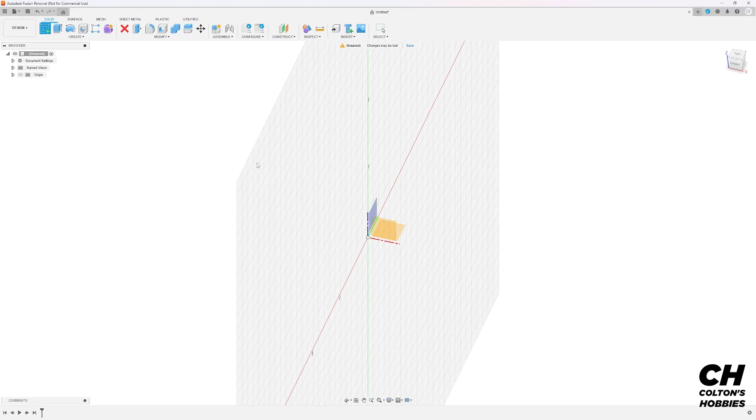So to get started here, we're going to create a sketch, and so a lot of times you're going to see sketches in this program, and then you're going to extrude something to be able to create the material. So let's grab our rectangle.

I don't want a 2-point rectangle because I want it to be on the center. So we're going to go to rectangles. You can see there's a 2, a 3-point. I'm going to do a center rectangle. I'm going to select the center point.

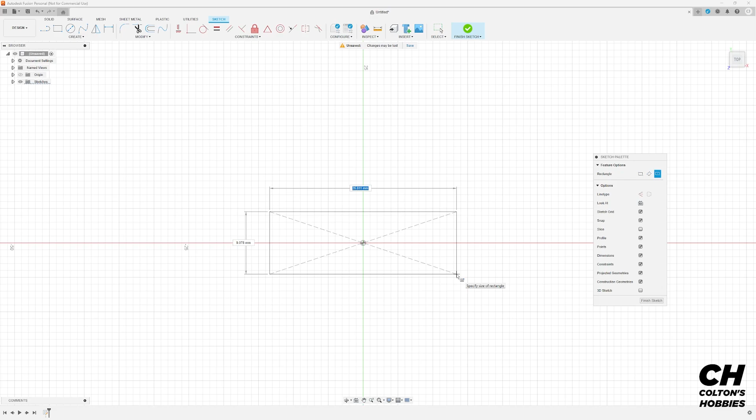And then as you can see, I have my rectangle, and I can adjust it with my mouse any way I want it, but I'm going to start putting in some numbers here, and it's going to dimension it for us. So I want it to be 80 millimeters wide. I'm going to hit tab. So it sets that top number in there, by 40 deep.

And obviously this is pretty big on our screen, so we can zoom out, use the middle mouse button to move around, and we have our wall.

Now we need to add some thickness, so we're going to go up here to offset. We're going to click our line, our outline of our building. Now this, depending if you're 3D printing, you can make this whatever you want to be, but if you're going to 3D print or if you're going to laser cut your building, you would want to set this thickness, in my opinion, to the thickness of the material you're working with. So if it's a 3mm MDF or basswood, set it to 3.

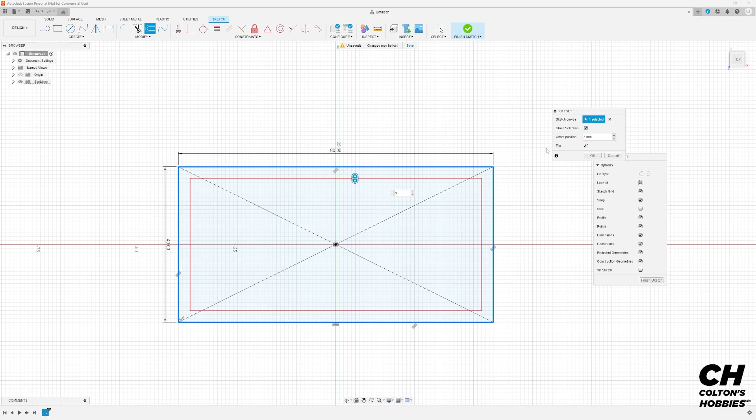So now that we've done that, we can hit OK. And now we could come out of here, extrude this up, make a 3D item, but you really would like to set up your doors and your windows before we get into that.

So let's make a door. So we're going to left click on 1 point. This is a 2-point rectangle. We're going to change this to the door width, and so I've set a parameter.

I'll talk more about that towards the end. And so this is automatically setting it to a set width, which I've set up as 10. Next, we need to, unfortunately, dimension these 2 points. I'm not sure why, I got to look into it, but we left click, and you can see how the blue line is just around the door.

We go to the top line, and we say 3 millimeters. Then we would like to further constrain this, because if you see the blue lines on the left hand side of that door, it's blue. We want that black. Black means it's fully constrained, and it's going to stay there if we adjust the model in the future. So we're going to tell it to be 10 millimeters away from the right wall. So that's door number 1.

We're going to make door number 2. Going to do the exact same thing over here. We'll dimension it, so from here to here, we're going to do door width. And then we need to set another dimension from this corner. We'll say it's going to be 15. And then just in case, we'll left click, select that sketch line, and it's already defined.

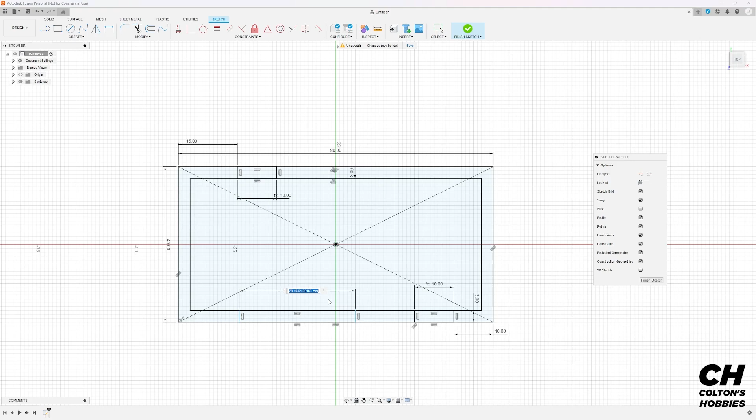All right, next, we're going to make some windows. And so I'd like a large window in the front of this house. And so I didn't have a parameter already set for this. So we'll left click, it's close to 30 millimeters, just for sake of even numbers.

We'll left click both the left side of that window and the left side of the building, and when we select it, we'll make it 15 from the side, and now that should be fully constrained. We'll double check, and it is.

Okay, next, we're going to create a window on the side of this house. We'll make it a 2-point rectangle. Once again there, we'll dimension from here to here, and I like that to be about 15.5. It looks like it's somewhat centered, but we need to dimension how wide this window is, so we'll go to window.

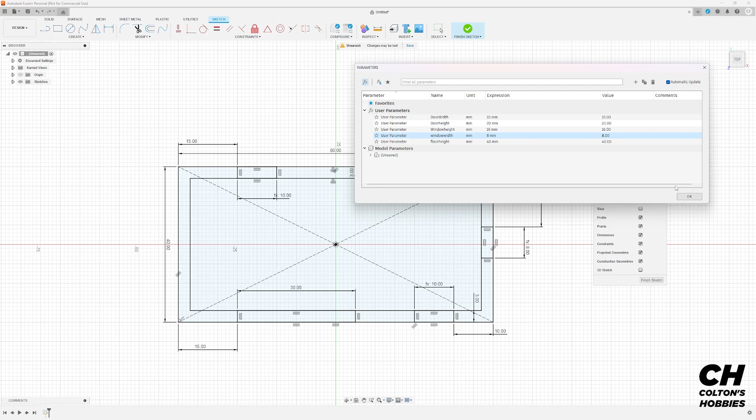They're both height, interesting, I typed in the wrong thing. But the bottom one seems to be the best, it's 8 millimeters. So I can go up to modify, change parameters, go to my window height, that's 8, switch that to window width, hit OK, and you can see how that's the same.

It still works. All right, last but not least, I want to do another window over here. We'll dimension that as well. And we're working in the solid workspace. And I want to go back to my sketch, so I'm going to double click here.

Sorry, we click on the sketch here. I misclicked. All right, so we'll go to sketch dimension, sketch that window, window width, and then we're going to dimension it from the side. We'll say it's 8. And then we're going to do one more window, and that's because I'm going to show you how to pattern the windows when you have a flat surface.

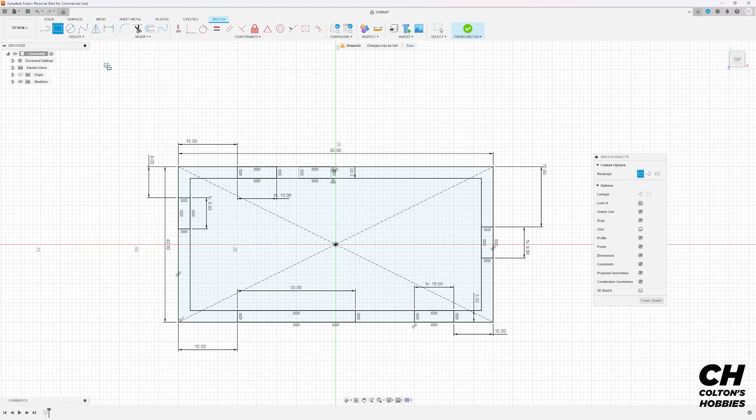You can pattern them all the way around the building, but typically if you can create them on your own, pattern a few things, because if you start patterning too much, Fusion 360 or your computer is going to really struggle. I tried to pattern like 40 different things, and it did not like that.

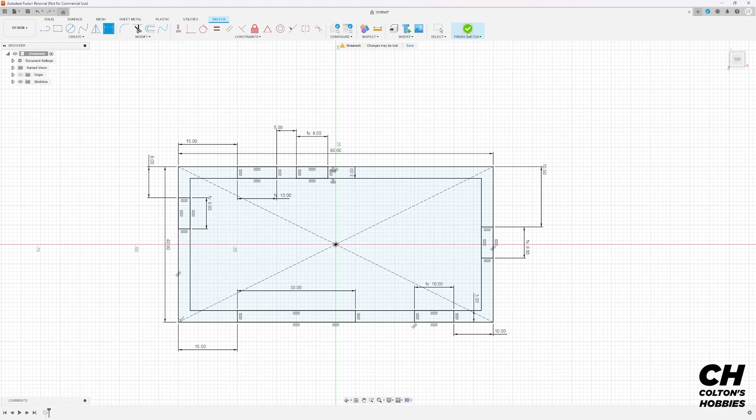So then I'm going to just finish dimensioning this. We'll say it's 5 millimeters away from that doorway, and then we're going to hit Finish Sketch. As you can see, we have our doorway, other doorway, 1, 2, 3, 4 windows.

Now it's time to extrude. So extruding is adding the material to your building. We're going to select the entire area, even though the windows and that are kind of separate here.

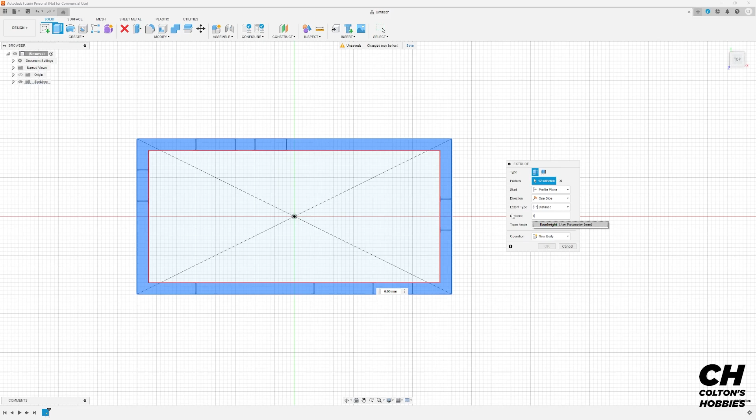And then the distance, I'm going to change to floor height. You can type in any number you want. We're going to new body, just means that it's a new structure, a new piece. We'll get into more of that in future videos. We'll hit OK. So now we have our rectangle. Doesn't really look like a house, but we're getting there.

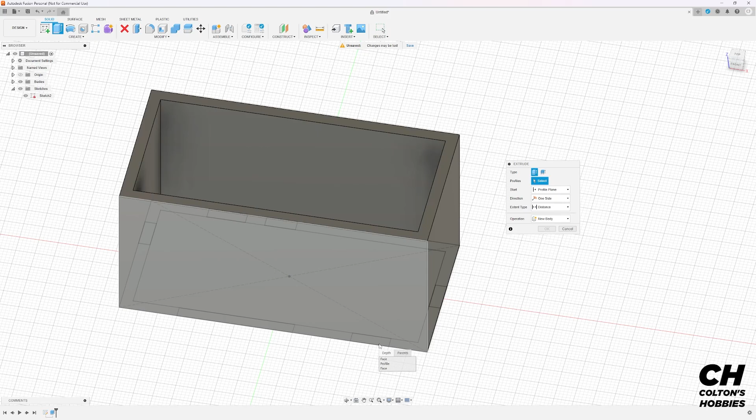So next we're going to extrude again, but we have to go up here to the top left for sketches. Turn our sketch 2 back on. And what we want to do is left click and hold. We can see how this pops up. I can select the face, the profile, or the face of the building. I want the profile. Now I can select through, click the other door. We want it to start from the profile plane, meaning the bottom where the sketch is at.

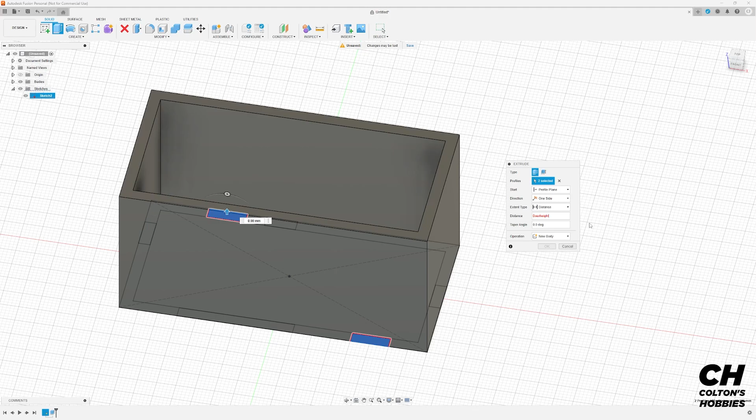We want it to be in one direction, distance, and then we need to change the distance. This is the height, so this is our door height. And boom, when I hit enter again, double tap it, we have our doors.

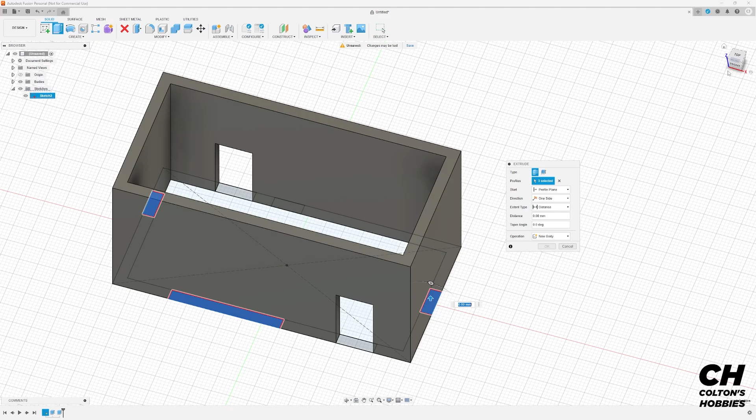So now let's do our windows. We're going to extrude one more time. I'm going to left click, profile, and this time I'm going to do these 3. I'm not doing this one because I'm going to do a rectangular pattern on this one, and I'll show you what to do with that one in just a moment. But we don't want our windows to start from the bottom because they start higher up in a building.

So we want it to start offset, which is really nice. So we can type in a number, we can raise this up. That's actually automatically doing the distance, forgive me. So for the offset, we have to type in the number. I want it to be probably 7.5 millimeters up in the air. Then my distance, I want to be the window height.

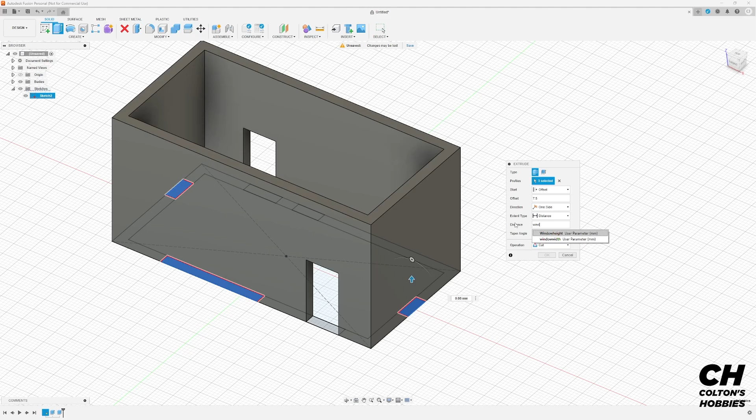So when I do the window height, it looks maybe a tad tall compared to how the doors are. So maybe window height -5, -3. As you can see, you can also do simple math or more complicated math inside the distance. So you can set parameters and then multiply, divide, or subtract and add to them. So I think that looks good.

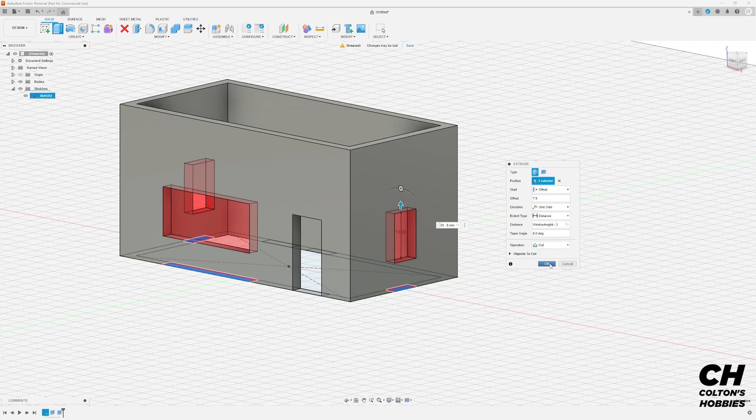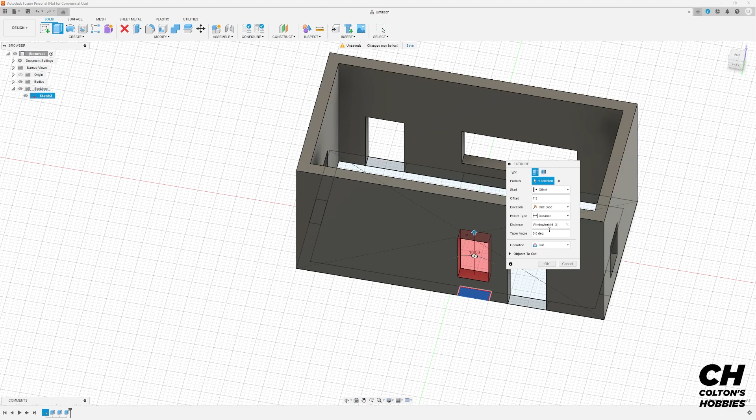We'll hit OK. So now we'll go back to the back portion of the building. We're going to extrude this profile for this window. Same thing, we're going to offset. I think I did 7.5. Distance was the window height -3. Okay, so now we have another window.

So now we're going to pattern this, which is super helpful in instances. So we're going to select rectangular pattern in the top left. We're going to go over here to our rectangular pattern area. We're going to hit features. We're going to select the window. And then the axis is, are we going horizontally? Are we going up and down? And selecting one of the axes.

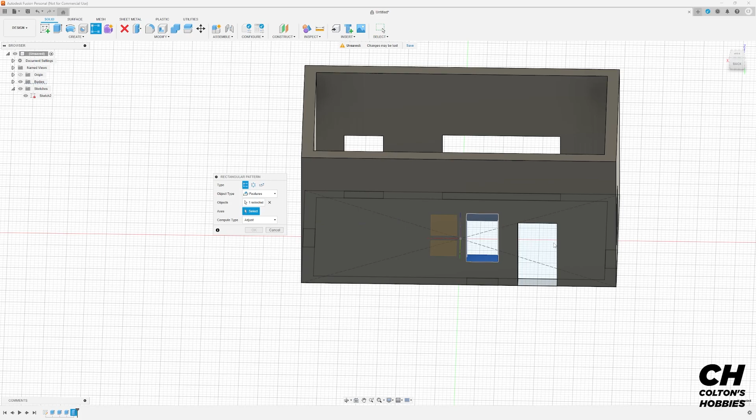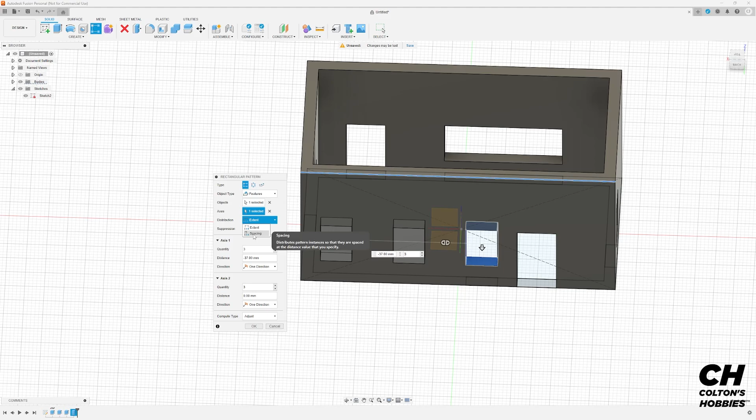Now, if you can't select one on your building, you can always go back to the original planes or axis. So I'm going to do the top of this building. And then I want it to be 2, we could do 3 windows. We're going to left click this one on the side, and we're just going to space them out. Now we can adjust the spacing over here on the side, one direction, extent, or spacing, but I think for the sake of this video, that looks pretty good.

So we're going to hit OK, and now we just added two more windows very quickly. There's a lot of windows on the back of that house. So it's coming along, but we need the roof.

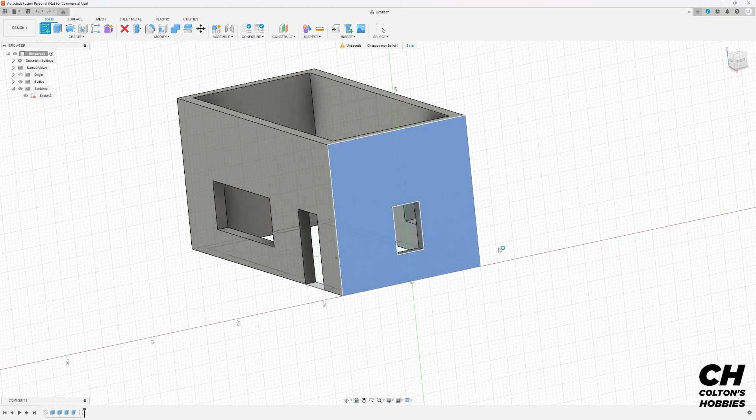One of the ways we can do that is to create another sketch. I'm going to create it on the side of this building. Now you can see these black lines, and you'd think you could connect to them, but you actually have to do something else first.

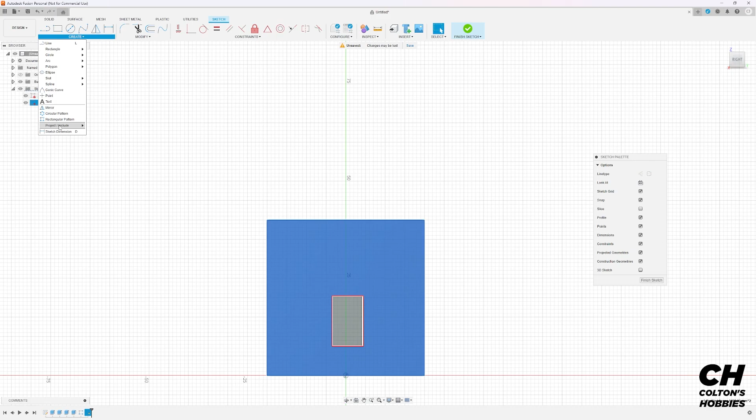You have to go up to Create, then Project. Select the area you want to project to this sketch, the sketch we're currently in. Bring the project over here, hit OK.

Now you can see the purple lines. That means those lines are now projected into my current sketch, my newest one, and I can go off of those and everything's going to stay connected.

So we're going to create a triangle. Go from here to here, that's my first one. This one's pretty easy because the center point is right in the middle of the building, but I'm going to create a construction line just to show you what that does.

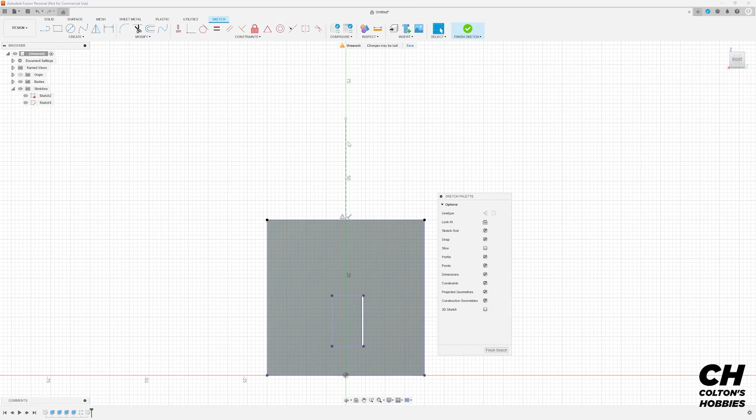So on a construction line, you enable it. I'm going to go to the middle of this building, left click, and go up. That's a construction line I can use as a reference point for my actual drawing. It won't go to a 3D printer or laser cutter, it's just for reference, but it can be super helpful.

So we're going to go over here to the left side with a line sketch, come to the middle. I'm going to start from that top point, come back down to the bottom right, and you can see we have a shape there because it's all in blue. At this point, it might click something, so you can hit escape to get back out of it.

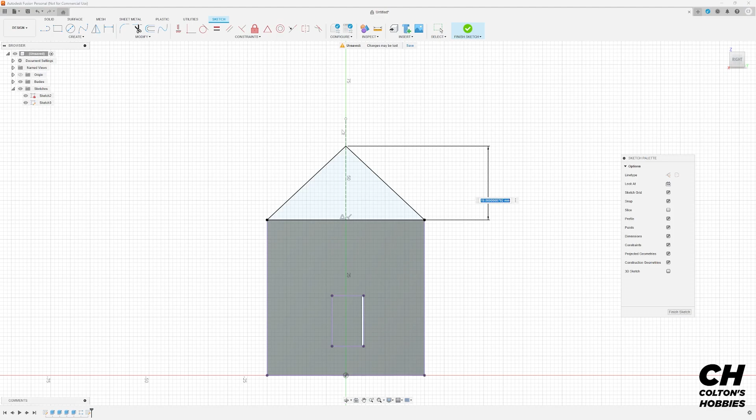Now we need to dimension this. I'm going to go from the top of the triangle to the bottom, and because I have that construction line, I only need one dimension to make this fully constrained. So I'm going to make it, let's say, 14 millimeters from the top, not too high of an angle.

At this point, we can finish our sketch, and you can see the sketch is on the side of the building. I'm going to flip us around, and now we're going to extrude.

I think you're getting the hint of what we do here. But in this instance, instead of dragging this across, which we could do, I want it to snap to it and be easier for me. So in the extrude tab, I'm going to start from the profile plane, which is where it's at, but I want the extent type to go to object.

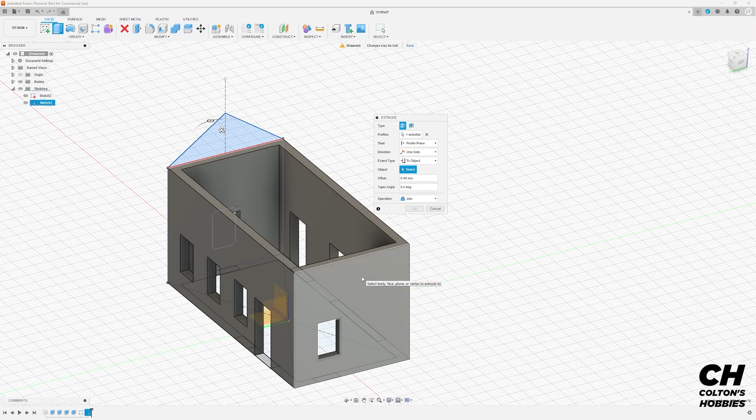So it's a body, a face, or a plane that you select. I want it to go from there to the edge of this wall. When I click that, it automatically snaps to it. Very nice. So we hit OK, and now we have our building.

Isn't that awesome? Now that we have our building, obviously if we were to 3D model this and print it, we could make clapboard siding go up the side of it, put in bricks. You could even put in bricks for your laser cutter, but there are better ways to do that.

So for the purposes of just laser cutting a building, I can now select these areas and they will automatically save the dimensions perfectly, so I can send it to LightBurn or whatever your laser cutter software is as perfect SVG files. So let's show you how to do that.

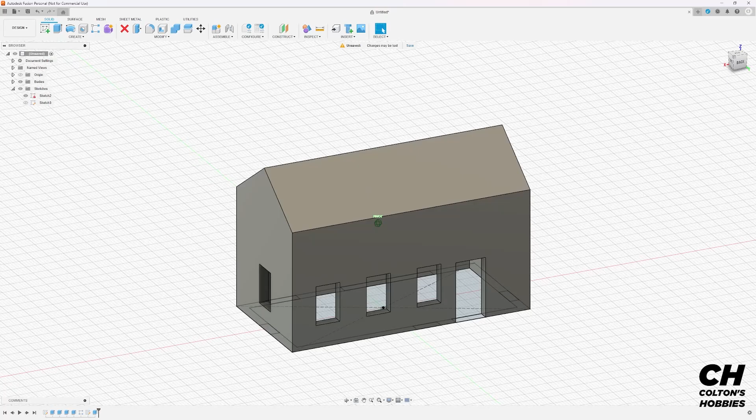But first, before I do that, let's say you make your structure, look at it, and think those windows could be a little bit bigger. So what we can do, because I set parameters and programmed them that way, is go to Modify, Change Parameters, and in the door width, I can adjust it—yeah, the door's a little small too.

So let's go up here to this one and change this. As you see, when I hit enter here, it's going to change the door and make the width wider. Boom. That is a larger door, almost like a double wide.

But did you notice the windows also shifted? That's because they were constrained off the side of the door. So there are reasons why you might want to constrain something differently so that you can adjust your model.

So let's change that back to 10 millimeters. We're going to go to our windows and make those 10 millimeters too.

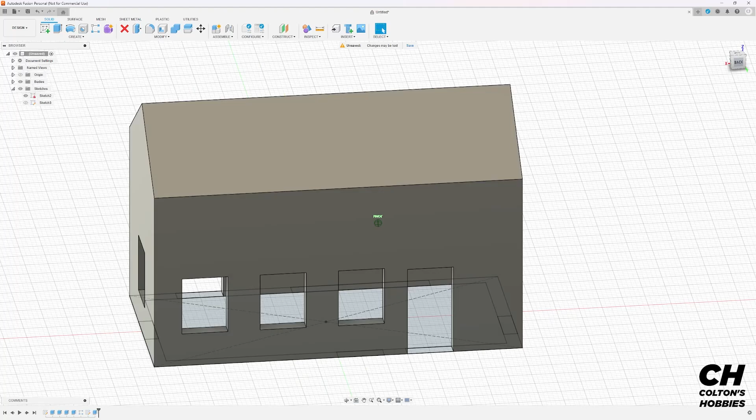And when I hit OK, I want you to see what happens on this side. If you recall, this window here, right here, was our initial window, and then it patterned out our window. So when we change parameters, not only does it change it for our window, but it also changes the pattern, because the pattern is going off of the original window. So it's very cool how to adjust this.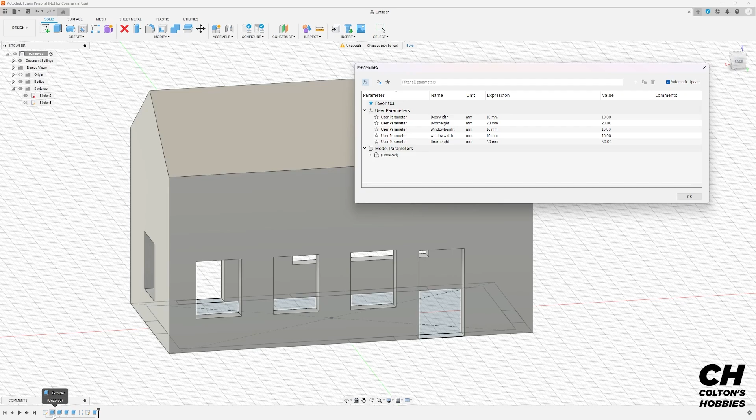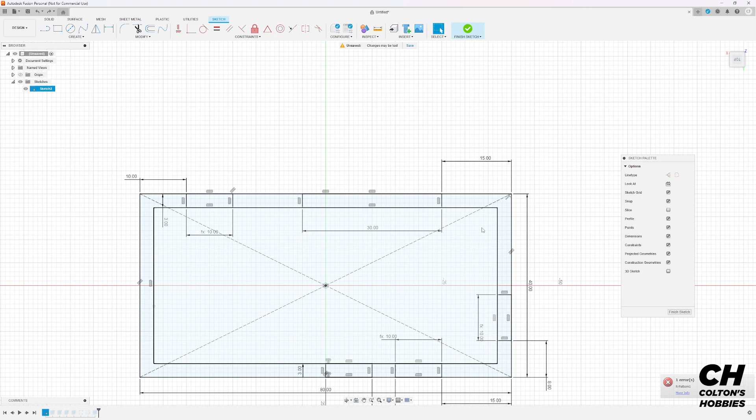Now, let's say we didn't want a window on this side of the building. So on this side, we're just like, you know what, that doesn't look very good. We can go to our original sketch. We can come in here and delete our window. And then when we finish it, you can see how it broke things. So obviously there is some change with that. I can hit Control Z, put that all back in there, leave it hunky-dory, and now we're fine.

Likely, I think the problem with that was because we did it to object and it didn't like to compute that. But you can see how you can accidentally break your own model, but you can fix it really easily. I could have just undid it until I got to the point where I wanted.

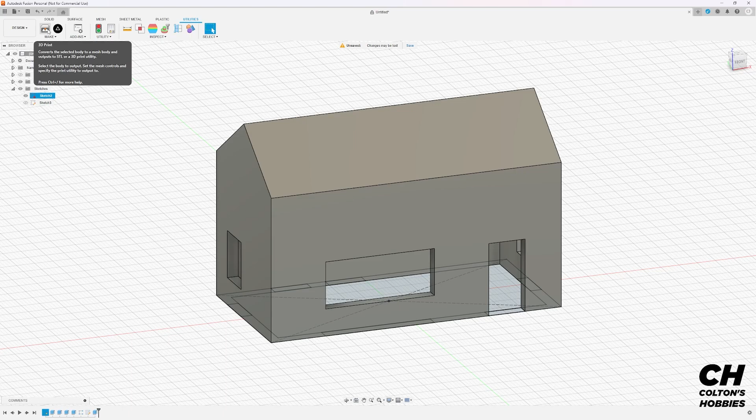So how do we get this to a laser cutter? How do we get this to a 3D printer? We can go to Utilities. When we go to Utilities, there's automatically a 3D print that shows up here, converts it to STL, exactly what you want to do. This you do have to add on to Fusion 360 as an add-on. However, it's very easy to do. It's free, just like Fusion 360 for hobbyists. Now, if you want to sell these things, obviously, you might have to buy the commercial license or whatever.

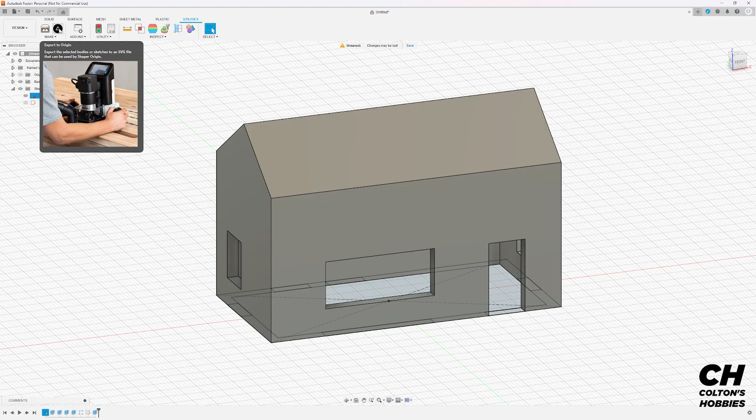But so this is called Export to Origin. This company made this awesome add-on for their item, device, whatever, and we can use it for our laser cutters. So let's left-click that. You can see it's called Shaper. I think that's the brand, or maybe the model. Shaper, I think, is the model. Origin's the company. But regardless, we can add this in. I'll show another video on how you can do that.

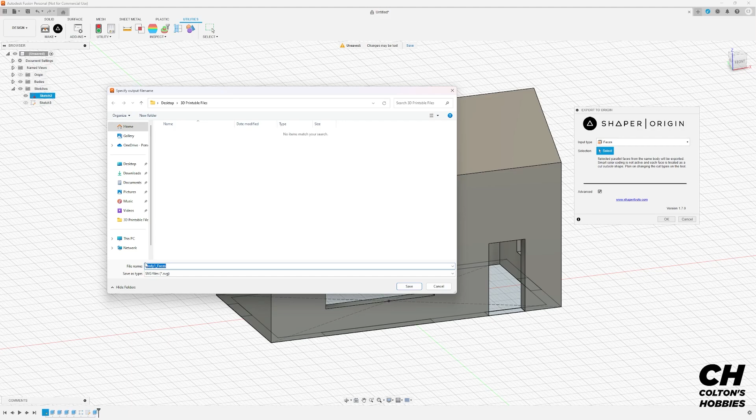And what we want to do is the input type, we want to be a face. And normally you can't see that unless you click Advanced, so you might want to click that. Click Faces. We can click the front face of our building. When I left-click, I hit OK. I can, as you see here, SVG file, export. So I'm going to say front face of building. I'll save it. And so now I have the front face.

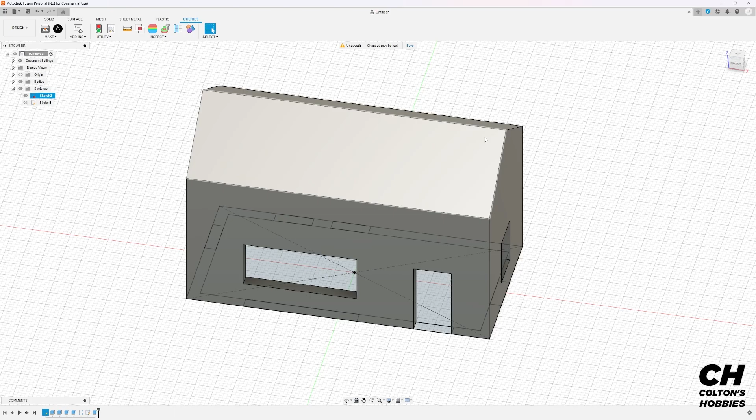So you would have to continue to do that numerous times for the left side, back side, or right side. If you wanted to do the roof, you could also do that as well. And so it'll set up that for you. And I think as far as the laser cutter goes, the only downside is you might have to make one side a 45-degree angle for those to butt up. But otherwise, they're accurate. And that's, I think, the most exciting part about this, is that when you send it to the laser cutter, you don't have to worry about cutting it out on card. It's going to work how you want.

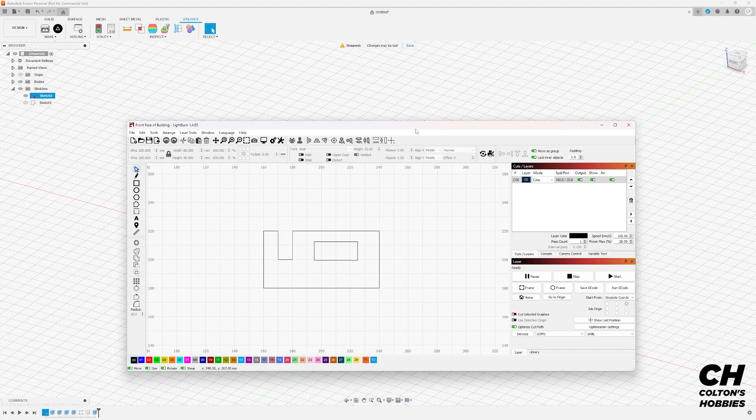So let's see what that file looks like. Let's go to my Explorer, 3D printable files, front face of building. You can see here, I don't know why it wants to open with Microsoft Edge. I want to open it in Lightburn. So as I open it, you can see how there is my model. Now, it was upside down, right? So we can see how that looked fine. So all we have to do is rotate this in Lightburn. I like to group them first because the window does not come grouped with the file and the SVG. So I group it, and then I can hit the period button in Lightburn, flip it around, and there you go. And obviously you could have cut it upside down, it wouldn't have mattered.

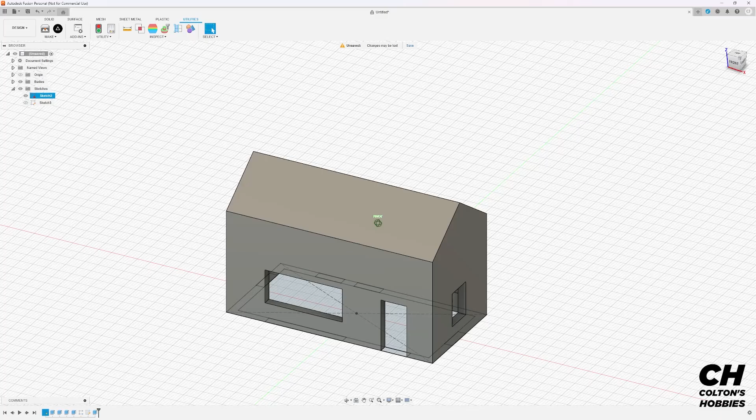So that's a very quick and easy way to make a model building. Free program, awesome for hobbyists if you want to do it by yourself. And then you can get really fancy and go, okay, you know what I'd like to do is I'd like to create the door and then 3D print that, but laser cut my building. And that's where I think we can really speed up the process, because you don't have to 3D print the walls, but you can make your laser cut buildings really elevate without having to purchase other features.